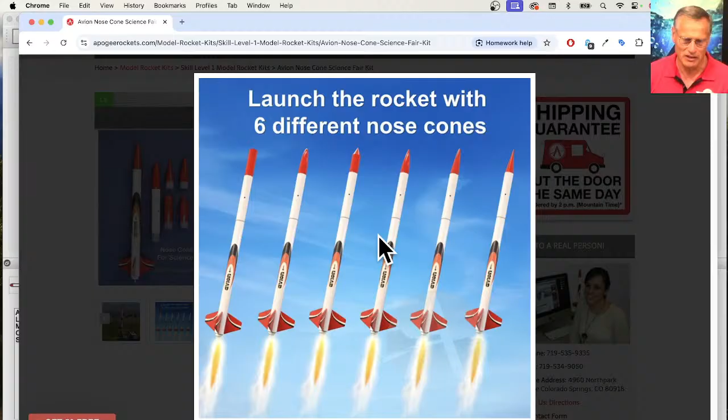So that's what I was working on earlier this week. Last Saturday we had a launch, and I got to fly it, and it worked great. It comes with 6 nose cones. Yeah, it flew great. Just giving you an idea of what I've been working on all week.

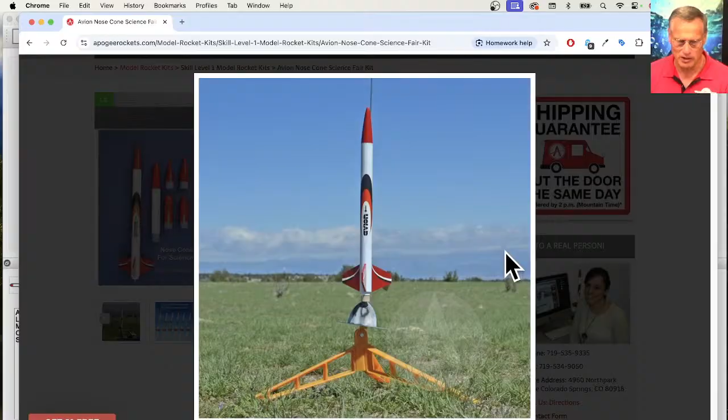So that's available now. We're going to officially release it on Tuesday, but if you want one now, you can get it now. I know most of you probably don't need to do an experiment with balsa nose cones, but if you have a student or a grandchild or a nephew, son, daughter looking for a project, this is an easy one to do. And like I said, it's a lot better now than it was in the past. I had to redo the whole instructions too.

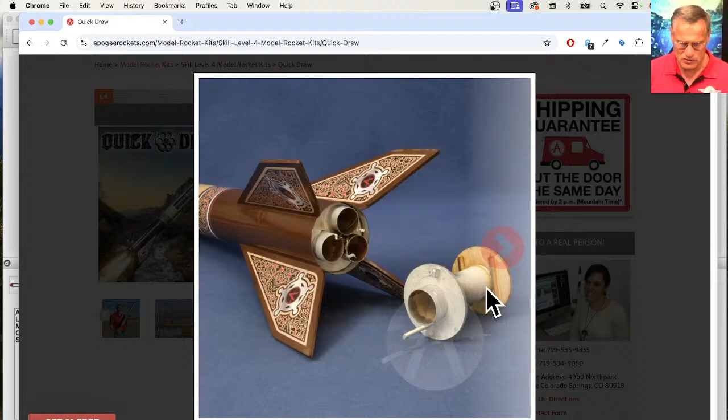So we were talking about the Quick Draw rocket. What it does is it has interchangeable engine mounts. Let's see if I can show you a picture of these engine mounts. So here's a single engine, here's a 3 engine, and it has all these laser cut parts.

We were thinking, if we were to design that today, would we do it any different? And the answer is absolutely, we'd do it different. Instead of doing all this in laser cutting, it would be 3D printed, and it would save the customer so much time.

And I was thinking, well, if I could 3D print that, what would be different? And so much would be different. It would make it a better kit, easier to build, and when it's easier to build, it's easier to prep. It just makes the customer's life better, and probably for no more expense, probably a wash in how much it's going to cost.

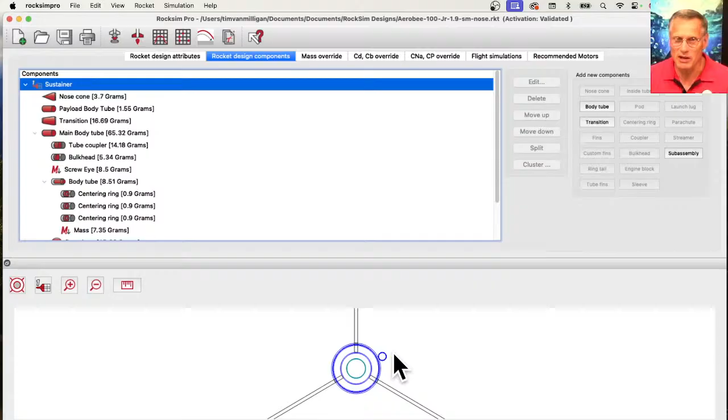I'm in RockSim Pro, which is similar to RockSim. So basically, what he's saying is, if you look at the rocket, here's the base view. What would happen if you put something on the side that was really heavy? How would RockSim account for that? The answer is RockSim would assume all that weight is on the center line.

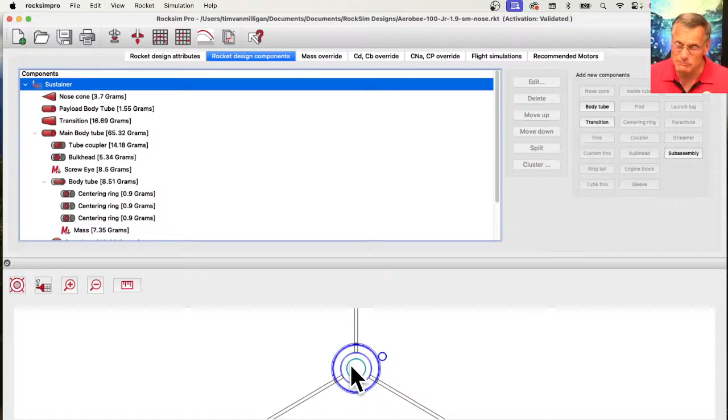Even RockSim Pro assumes the weight is along the center line, I think. How would I test that?

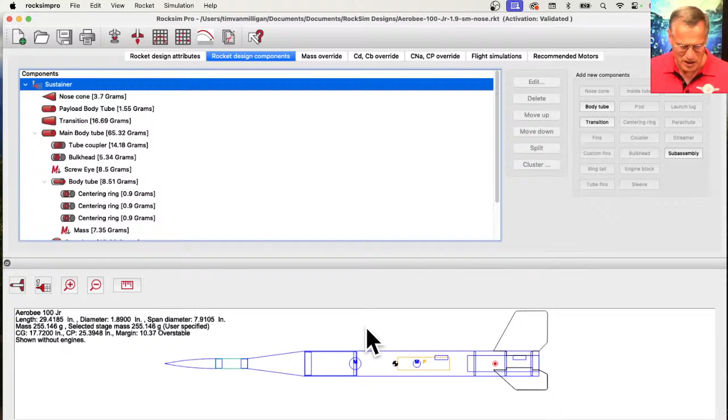Well, let's put something heavy on this side. Okay, so how do you put something heavy on the side? Here's how you can test. Let's run a simulation. First let's put something heavy in here, then we'll run it with the object inside the rocket and then off to the outside.

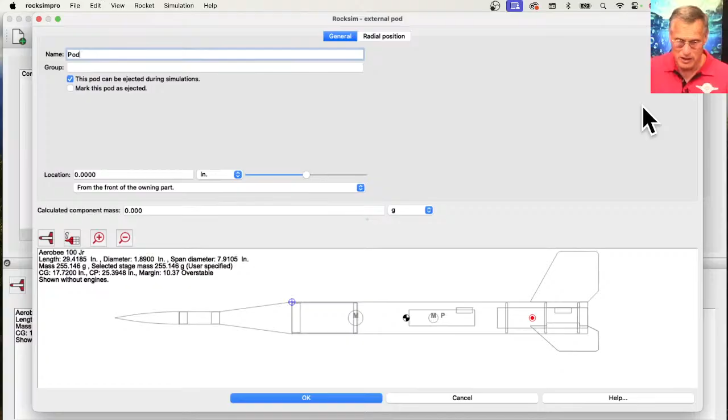So let's select this main body tube, and what I'm going to do is put a pod. A pod is a placeholder, kind of like I'm going to attach parts to the pod. So let's call this pod, and I'm going to say this pod cannot be ejected during simulations. Right now this pod is right here.

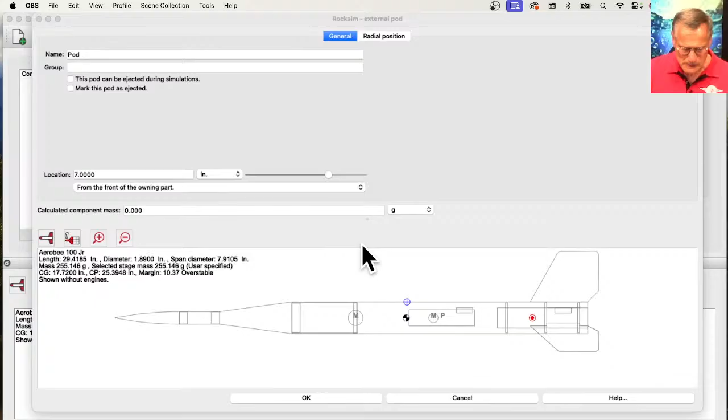I'm just going to move the location. I'm going to put it near the center of gravity. See, here's my center of gravity, and here is my pod. Hopefully you can see that. Okay, and then click OK. So now the pod doesn't have any mass right now, so we're going to attach a mass to this pod.

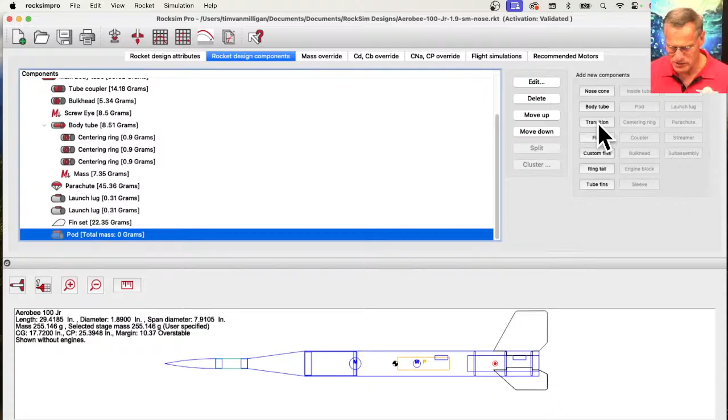I'm looking for something heavy. I want to say a mass object, but I don't have a mass object, so we'll go with a body tube. I'm going to not select from the database, and let's make the outside diameter 1 inch, the inside diameter starting right here, and we'll give it a length.

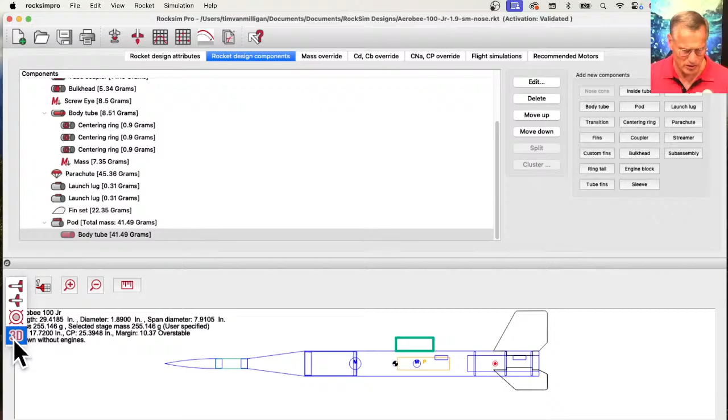2.875 inches. Right now, this has a mass of 41 grams. So we have a mass of 41 grams, and I'm going to say OK. Now if you look at it in 3D, it's just a slug hanging off the side of the rocket. This slug is going to cause drag as well as having mass.

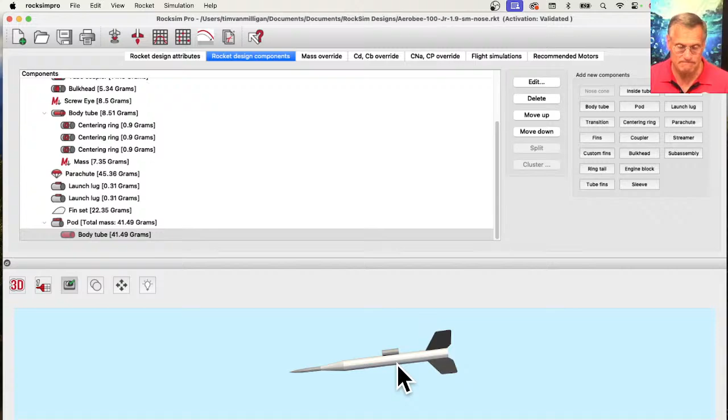Okay, so let's move this mass inside of the rocket. To do that, you come back to the pod, double click on it, and come up here to radial position. Right now it's automatically calculating the radial distance, so it wants to put the edge right along the edge of the tube. If I uncheck both of these and set the radial distance to 0, the radial distance from the center line is now 0. So it's right there, and I'll click OK.

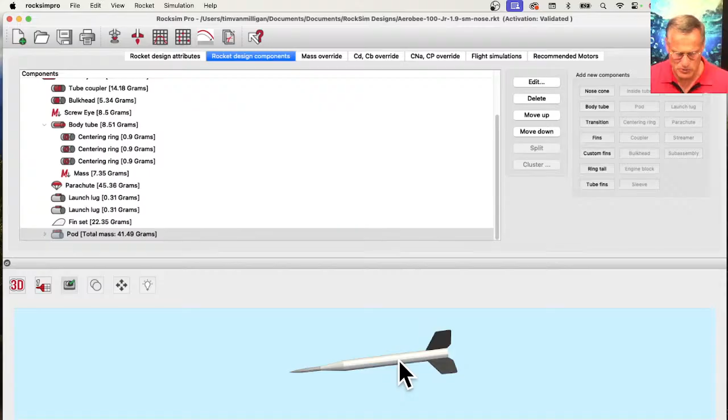So now the mass is right in the middle of the rocket. I'm going to change the name and change the color so maybe we can see it. Let's call this Sluggo Mass, and give it a color, a 2D color that's red, and a 3D color that's red. Click OK. So it's on the inside of the rocket right now, so you can't see it from the outside, but you know it's there.

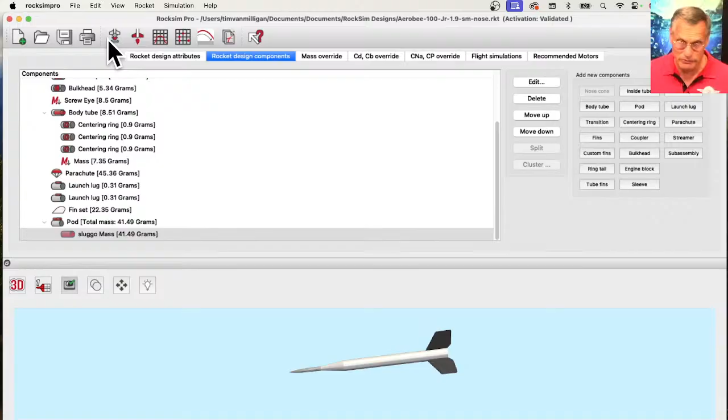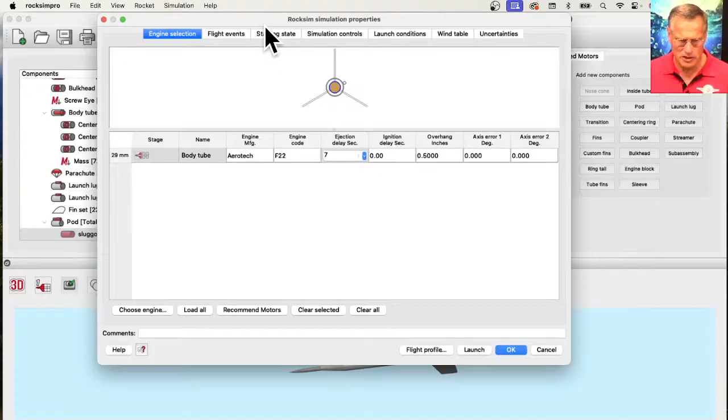So let's run a simulation. Choose an engine. This is a 29mm rocket. Let's go with Aerotech F22-7. Click OK. Now we're in RockSim Pro, so we can do three-dimensional simulations and see the effect. We'll deploy the parachute at Apogee.

So the parachute's going to be deployed at Apogee. Starting state, we're going to launch it straight up, so it's at 0 degrees azimuth, 0 degrees angle from vertical. I'm just looking at my settings here before I launch.

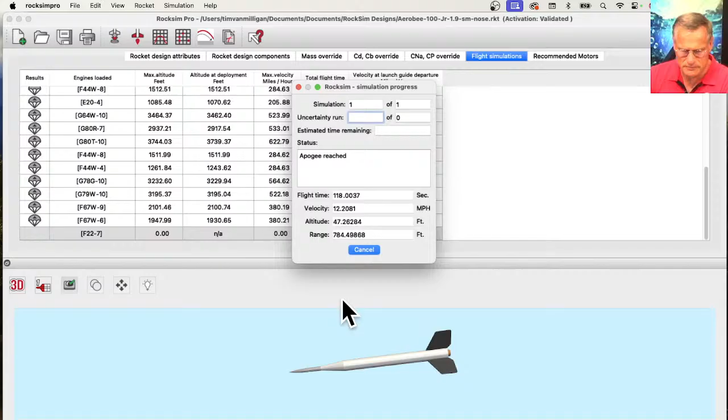So let's run a flight profile and see what this launch looks like. It's going to run the simulation, and then it's going to load the launch visualizer in just a second.

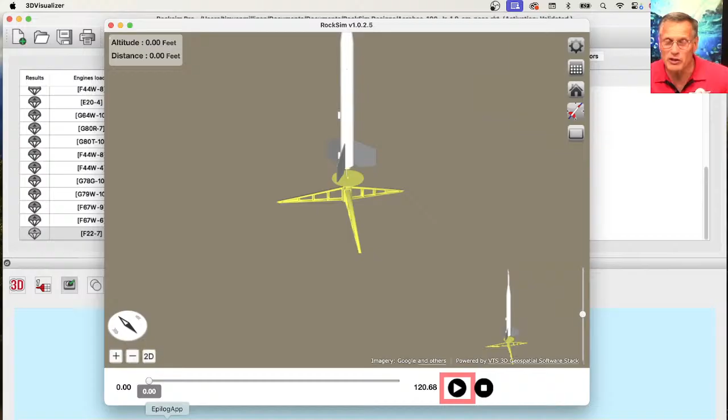While I'm doing that, Johan says, hey, you saw my transparent cockpit canopy? I think I'm on to something. I have not seen your transparent cockpit canopy. We have some canopies on our website, but they're not transparent. But we do have a camera hood that is transparent. We could do transparent canopies. We can't 3D print them because although there's resin that's clear, it makes a step, so you'd have to really sand it and then polish it. You'd have to sand and polish both the inside and the outside, because if the inside had the steps in it, it would give a frosted effect. But resin can be polished like glass, because I've done it.

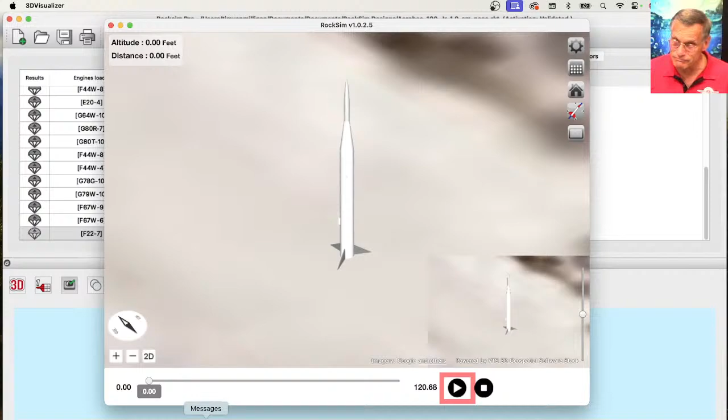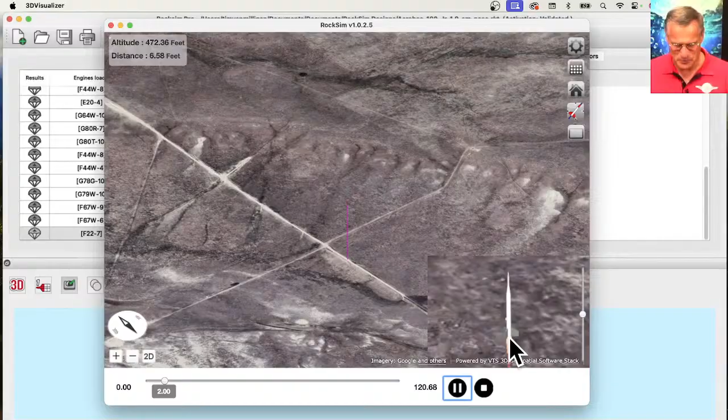Anyway, so here's this rocket. It's sitting on a road out in the middle of a field somewhere, and I'm not sure where this is, but I just want to run a simulation. You can see the rocket right down here is almost dead still. It rotated just a little, but if you look at the trajectory, right there's Apogee. I'm going to zoom out. So this pink line is the trajectory, and it's almost perfectly straight. I was seeing if it was arcing anyway. And it reached an altitude of over 2,000 feet, 2,098 feet to be exact.

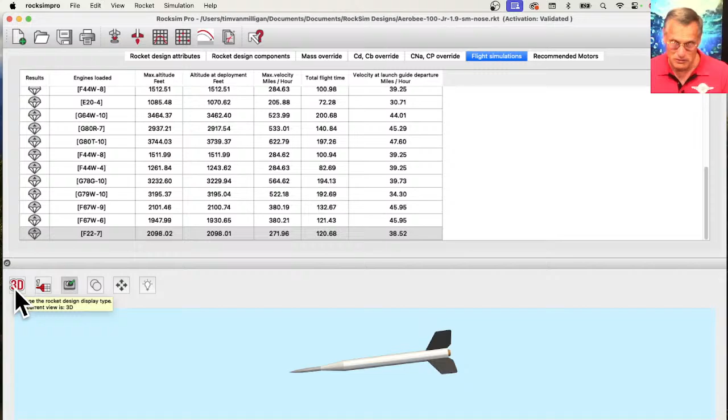Okay, so that's with the mass on the inside. Now we've got to put the mass on the outside. To do that, we're going to go back here to the pod and change that radial position again. So radial position, automatically calculate it - and it didn't like that. It only does it the first time. I wonder what happened. Calculate the radial distance - it doesn't want to.

1.5, 0.45 - right there, that looks pretty good. That's like right along the side now. Okay, it's on the outside of the rocket. And if we look at it from the base view, you can see it's right in line with the fin. That's okay.

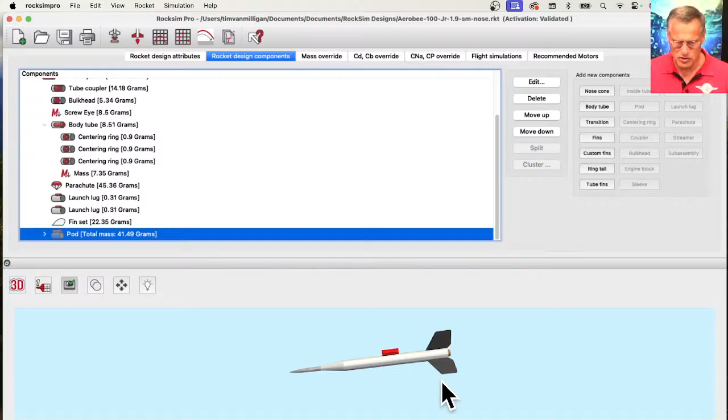Okay, so now we're not going to change anything, and we're going to run another simulation. All the same settings, and we're just going to see what the flight profile looks like with the pod hanging on the side. Now we've got mass off to the side, and we have extra drag on the side. The thing I'm not sure of is whether it's the extra drag on that side or the extra mass on that side - is it calculating it? It's loading the launch visualizer.

You can see that it's sitting off to the side. Somehow it's not showing my launch pad. I'm not sure why.

Oops, I wanted to see this view. So the rocket is sitting right down there. Zoom in just a little bit. And launch.

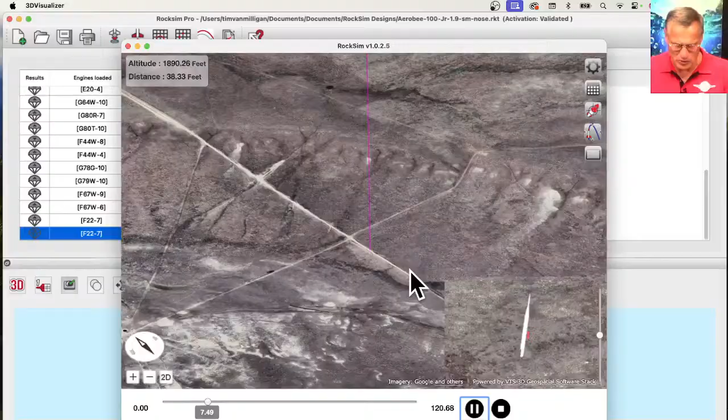Okay, so the rocket is going almost as straight as it was before. And we're going over 2,000 feet, so that it is causing some drag there. I should have a little wobble in this trajectory.

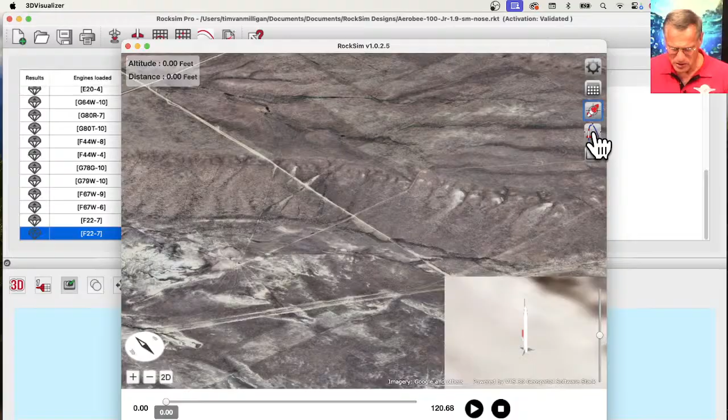Let me pause it. Let's go to the rocket view. Close this one. Let's see if the rocket seems like it's doing anything as it's taking off. It's still like rock solid. It's rotating just a little bit.

Okay, and then the ejection. So if I go back here, yeah, almost the exact same altitude. In fact, it is exact. So we're not seeing anything different. So that answers the question that RockSim still assumes that the center of gravity is along the center line.

But very good question. Rick Dickman says, how do you check motor tube size from a downloaded file? I am trying to confirm a 29 millimeter motor tube on RockSim, but I haven't figured it out. So,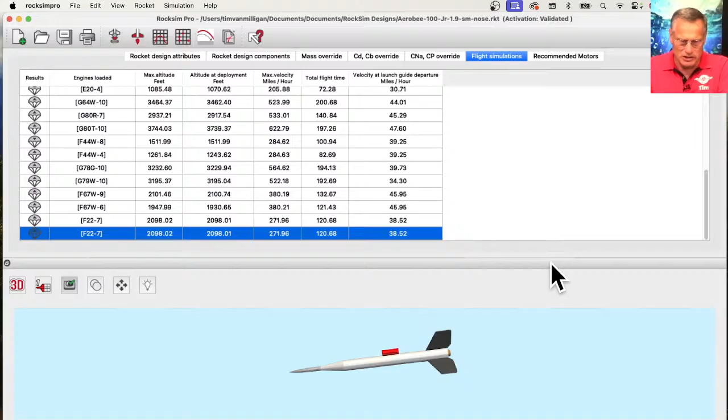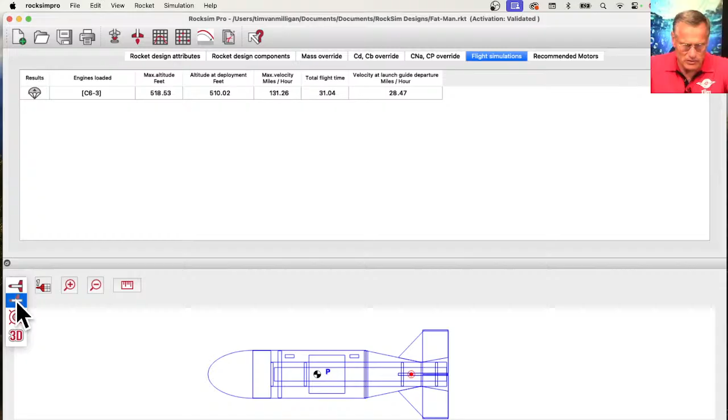So if I open up a new file, and so I got this rocket. Just from looking at the file name, you don't know. You got to open it. Save my changes? No. Okay, so here is this rocket, and just kind of like looking at it, there's no indication here of the motor diameter.

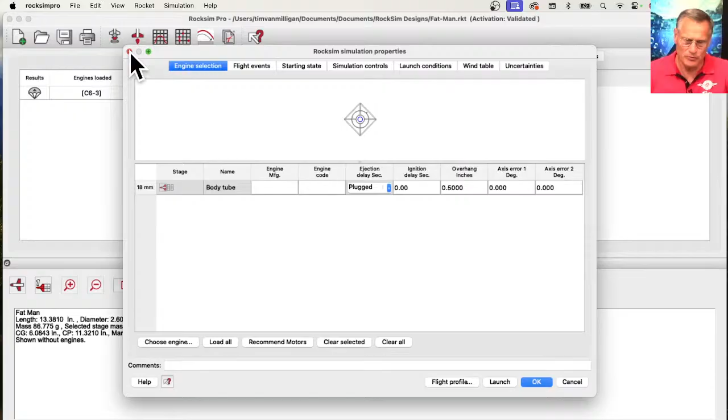So how do you figure that out? Here's the fast, easy way. You just go to prepare for launch, and then right here, it lists the motor diameter. So this particular rocket uses an 18 millimeter diameter motor. So just open it up, and by loading a rocket motor, see what diameter you're going to need.

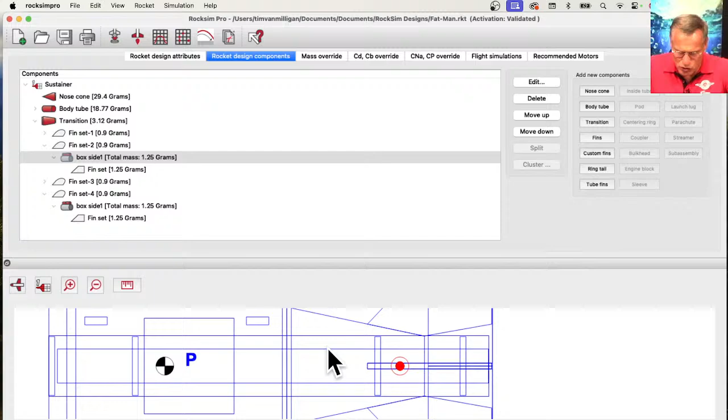Other than that, you could also find the motor tube here in the design. So, I would assume maybe that this tube, no, that's not that. I'm trying to click on this tube. Can't click on it because there's so much going on.

Yeah, so it's kind of like you're looking through the parts list, and the problem is when people design rockets, they just leave the generic names and don't change anything. So like this tube right there, that's a body tube. So this is the tube I was trying to click on because I think that's the motor mount tube, but it doesn't tell me that's a motor mount tube.

So then you have to open that up, and then you look for, this is a motor mount tube. So if it's selected, then I know it's the motor mount tube, and then it will tell you the diameter right there. But like I said, the easiest way is just go to load a rocket motor, and it's going to tell you what diameter you should be looking for.

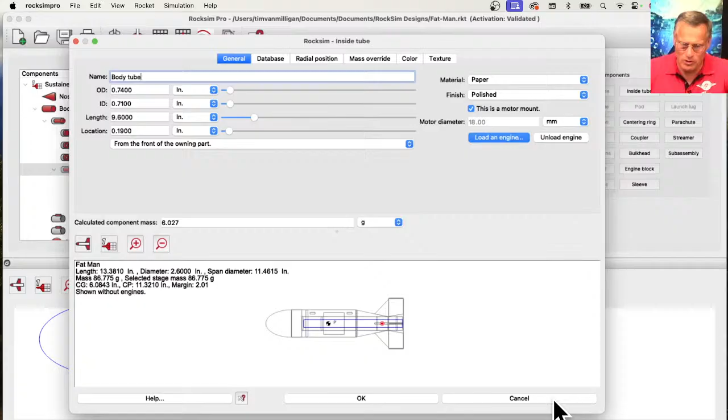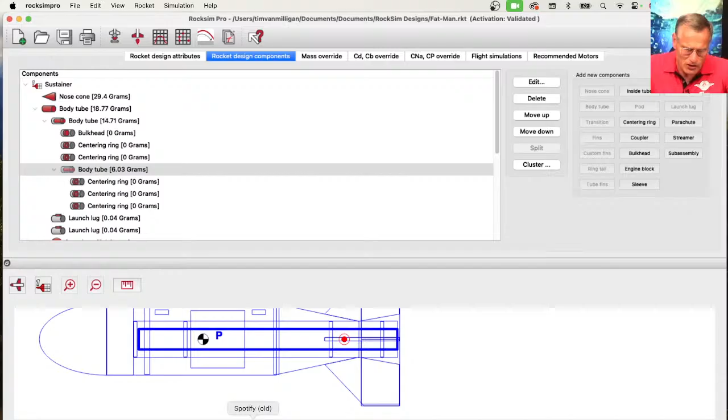David from Michigan is here under the name Purple Haze, and he says, better late than never. And Johan says, I think I found a way to make it out of PET. He's talking about his clear canopy. I think that's what we use ourselves when we make our clear camera hoods.

So this is a camera hood. You can see that it's clear. And it's basically the same thing. And this is vacuformed, and PET vacuforms really well. It's easy, and it stretches really nice. So if you're going to make a canopy out of clear, PET is what to use.

Rick Dickman says, thank you, that cleared that up, very nice. And he was asking about the motor size. All right, so that's all the questions I've got so far. So bring on your questions.

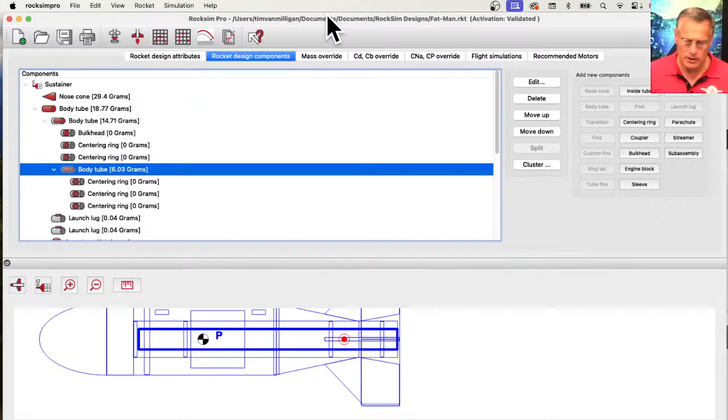I know you're waiting for people to ask questions. Maybe there's something else I can show you on our website. What have we been working on?

We're working on a new Mako kit, a Mega Mako. So here's the Mako, and the Mega Mako is going to look identical, except the difference is it's going to be 4-inch diameter instead of 3-inch. But pretty much it's going to be similar. Martin is working on that.

What else? Yeah, we're working on redesigning 3D components.

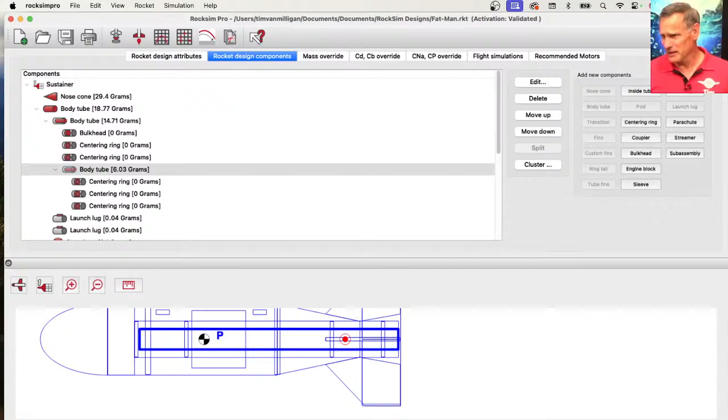So on the RockSim front, programmers are still working on the next version of RockSim. It's actually going to be RockSim Pro, and I showed it to you last week. The big thing we have to look forward to is this RockSim Pro.

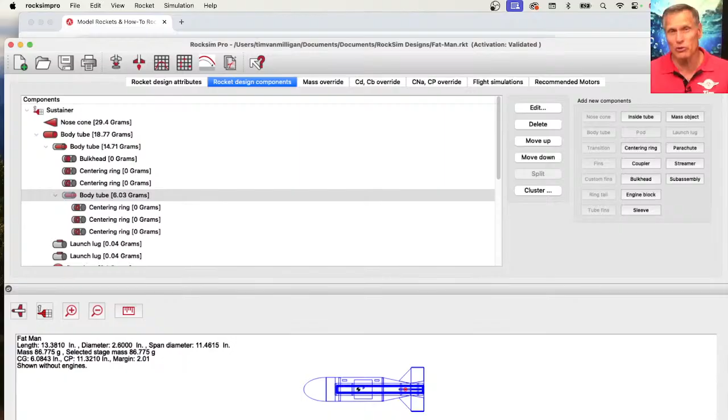RockSim Pro right now is $30 a month. We're going to make it essentially free, and I say essentially - it's not going to be quite free, but it's going to be essentially free because we're going to give it away free to people that spend $35 per month.

So one month you might buy a pack of 2 F motors, like $40. That gives you RockSim Pro for one month. Then you come back the next month and maybe you buy a kit, and the kit is more than $35, so then you get another version of RockSim for another 30 days. You can just keep doing that.

And you're going to be buying rockets anyway, and your Apogee is your favorite supplier. So just keep coming back month after month, and you can get RockSim Pro essentially free. Each one will be a 1 month subscription, but you'll be able to do everything in there.

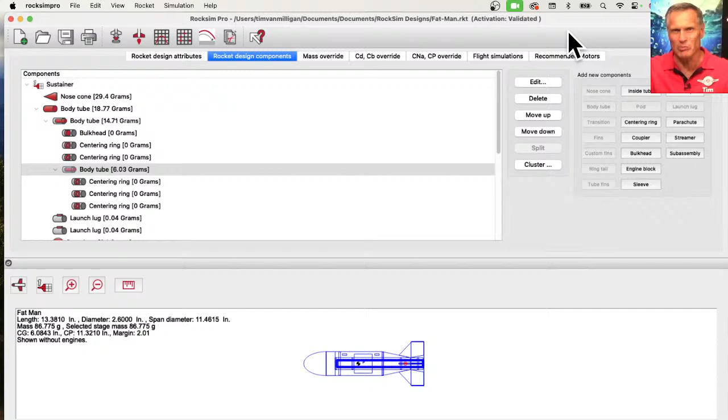But the caveat is it's also going to have some advertising in it. Like you get a piece of software, and the first thing that pops up when you open it up is an ad. Well, that's kind of like what we're going to do. It's going to be ad supported and essentially free.

So our hope is we want to get more people to use it because RockSim Pro is so much more powerful than RockSim, but not enough people are using it because it has a higher price tag. So we're going to take that price tag and make it essentially free.

And Johan says that was him about the Voyager picture. Thank you, Johan.

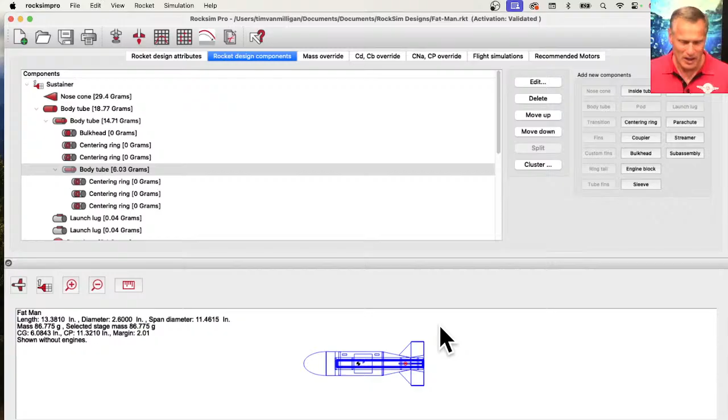Okay, so Curtis House asks the easiest way to get a parts list for a scratch design. So this right here was a scratch built rocket, and this was actually a plan in our newsletter. So to get a parts list, this is the parts list right here.

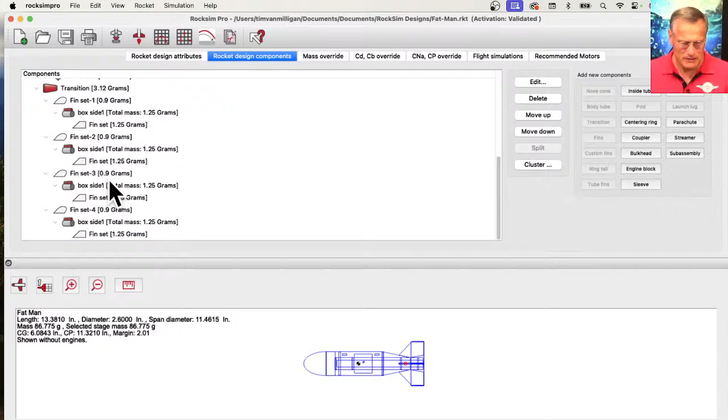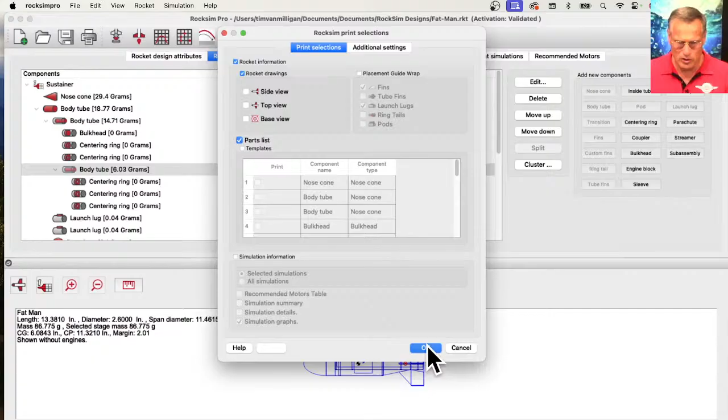To get this as a list, what you do is you go to print, then you come down here to rocket information, uncheck simulation information. If you check simulation information, it's going to give you how high the rocket flew - you don't want that. So you want rocket information, but you don't need any of the drawings - what you want is a parts list. Then when you click OK, under additional settings, click over here and it says print this to a PDF.

So when I click OK, it should bring up a print dialog. And if I hit print, I think it's going to print it as a PDF. And the problem is, where does it put it? I think it put it in the RockSim folder.

So if I go to my applications folder and find my version of RockSim that I'm using - and here's the thing, I've got many versions of RockSim, I think I'm using this one. Let me scroll through here - it's not in the media folder, not in the data folder, not in the designs folder, not in data import. I'm not sure where it saved it.

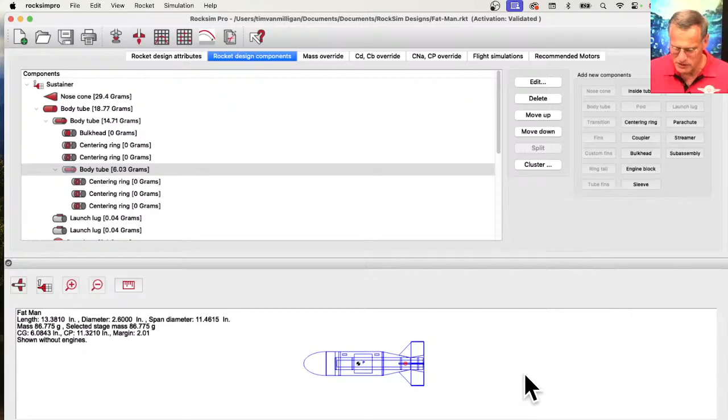Let's try it again. This time I will go print, and I'm going to uncheck here, print to PDF, print selections, and I just want the parts list. Click OK. This time I'm going to select save as PDF, and I think this time it will allow me to select where I want it to save. Okay, it's RockSim Pro. So that's where it should have put it the last time. Let me go back there.

I've got a whole bunch of folders open. Let's put it on the desktop, and I'll call it parts list.

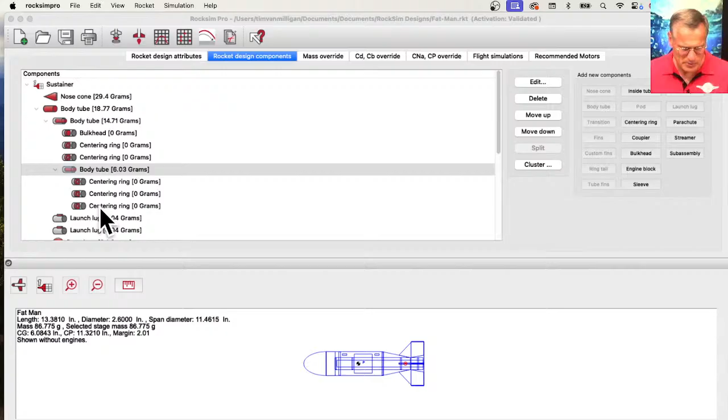It's going to save it as a PDF. So when I go to my desktop, it says parts list. When I open this up, you can print this to a printer or you can print it to a PDF, and this is going to give you a parts list.

Essentially it's the same thing over here. So we have nose cone, then body tube. There's a lot more information here. If you select from the database, it's going to give you the name that's in the database. And if you choose an Apogee part, it'll have a part number.

So this is 10198. If I go to the Apogee website, go to the search bar, and search 10198, and click on it, sure enough, that's the 66 millimeter by 18-inch long body tube.

Then we have another body tube, and it says its name, that's the name you'd use where you order it from Apogee, the name on the Apogee website. But if you look carefully, the length of that tube is 9.8 inches long. So it's not 18, it's 9.8.

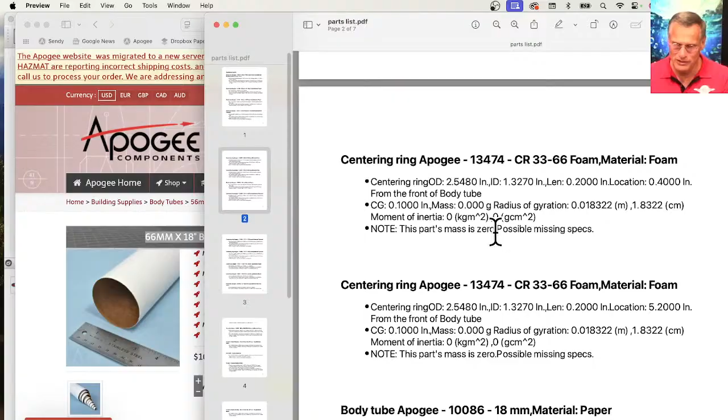Then we have a bulkhead, and it gives you dimensions. Again, this is an Apogee part. This is why it's so important to order Apogee parts, because we try to make it easy for you. Look at all these Apogee parts in there.

If it's something that is custom, you're not going to have all this extra information. You'll have this information down here, but not this name. So it makes it easy to order parts when you buy from Apogee and use parts in the Apogee database.

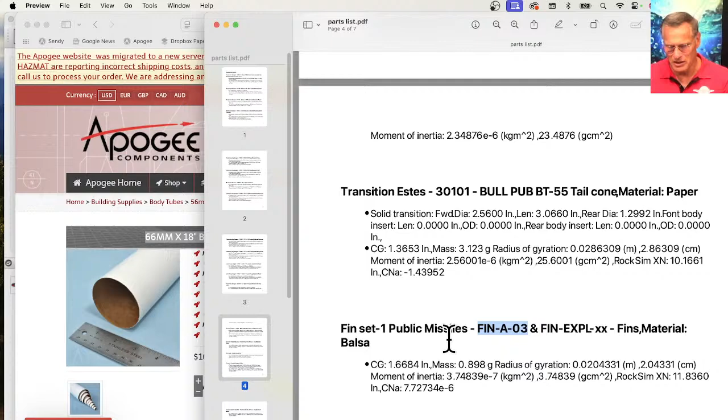Okay, so here's one right here. This was a public missiles fin, but I have no idea what that is. It's a fin A03 from public missiles. And then we have a box, and it's custom material. Another fin set. So it gives you parts.

It's a long parts list. This is 7 pages long. So that's how you do a parts list.

Johan says it's cool anyway. Facebook is a much happier place than Twitter these days. Yeah, we have a Twitter account for Apogee, but I don't know how to post on it. Right now I'm doing all the social media myself.

Estes asks, how can I model transient instability in RockSim during the coast phase of a high thrust short burn flight? Transient instability.

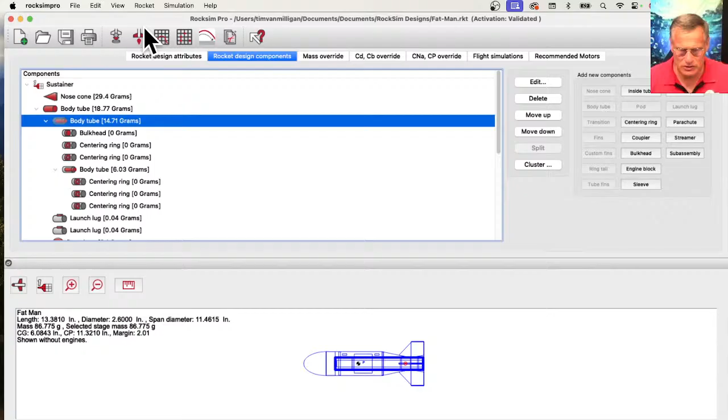All right, let me see if this version of RockSim Pro... it would only be RockSim Pro that you could do it. I'm just double checking if this particular version supports it. Yes, okay, I can show you in this version. First, let me find a different design file.

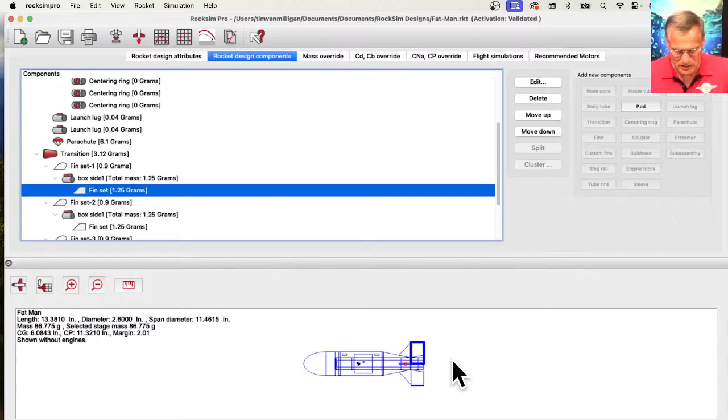Aerobee 170, 18 millimeter, I'm just looking for a simple design. Oh, and I crashed. That's not supposed to happen. Close that.

I wonder if this... I can't see who Estes is. Cancel. If it's somebody that, if it's Adam, I don't know, you can't see the little icon. So I know people at Estes do have RockSim because I gave them a copy. I mean, even Estes should have the best software.

Aerobee 300. Okay, close enough, simple enough. So this instability is going to be caused typically by fin flutter or a tube that is flexible. Now we can't model a tube that is flexible because RockSim assumes everything is rigid. It even assumes fins are rigid.

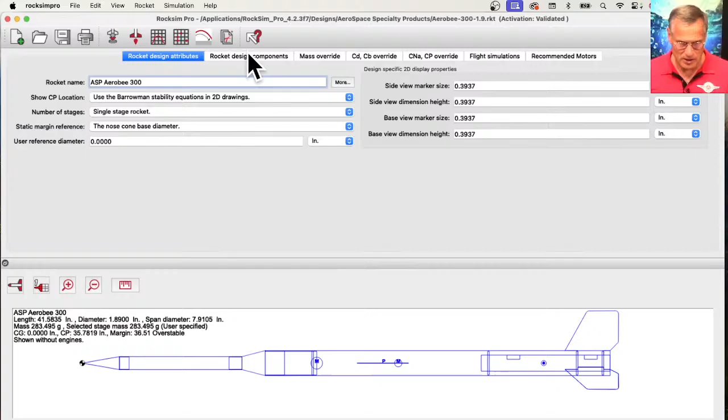But there's a new feature in RockSim Pro that will be in the next version that's going to be released, which is the one that's going to be essentially free. In there, if you go to the design components, I can tweak the fin so that it shifts and makes the rocket unstable. So if I go to the fin set, first of all, you can calculate at what speed the fin is going to start fluttering.

So let's say I'm not sure which material has a shear modulus. In the database we have all these materials, and if you knew the shear modulus of your fin, which is like how stiff it is, it would show the shear modulus here. Basswood does not have a shear modulus. Let's try balsa wood. Okay, so this one does have a shear modulus.

And it's already calculated the speed that the fin is going to start fluttering, and that's going to be 311 feet per second. You can change that to miles per hour if you want, about 212 miles per hour. So if I can get this rocket going 212, that's what he's talking about during the coast phase of a high thrust, short burn flight.

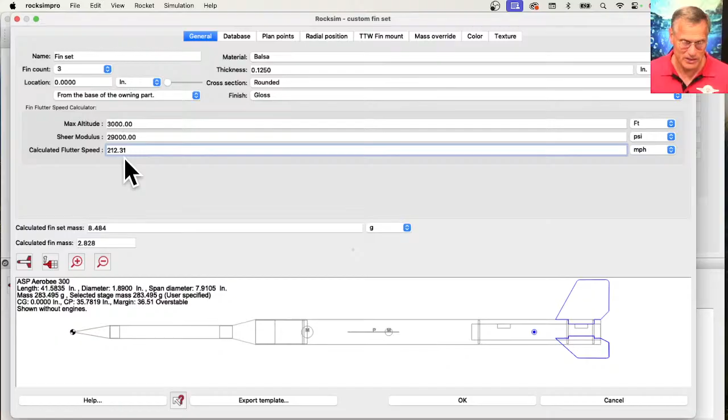So in order to get up to that speed, it's got to be a short burn, high thrust motor. Can we get this up to that speed? Let's take a look. So this is a 29 millimeter motor, I guarantee you I can get up to that speed. So for a high thrust motor, choose it by burn time. You can see we got a lot of high thrust motors here.

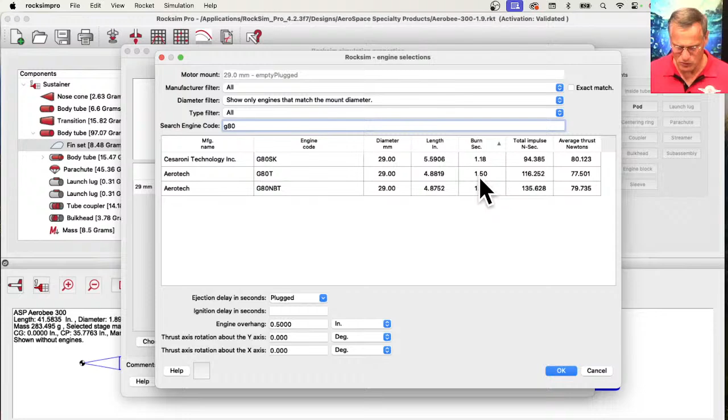I'm looking for like a G80. A G142 is technically a high power motor because it's greater than 80. I was looking for a G80. Come on, G80. Okay, so here's a G80. This has a burn time of 1.5 seconds. And ejection delay, let's say it's a 10-second delay.

And flight profile, so remember before we were just launching straight up, and I don't know if there was any wind or not. It's running the simulation here. Got the spinny ball.

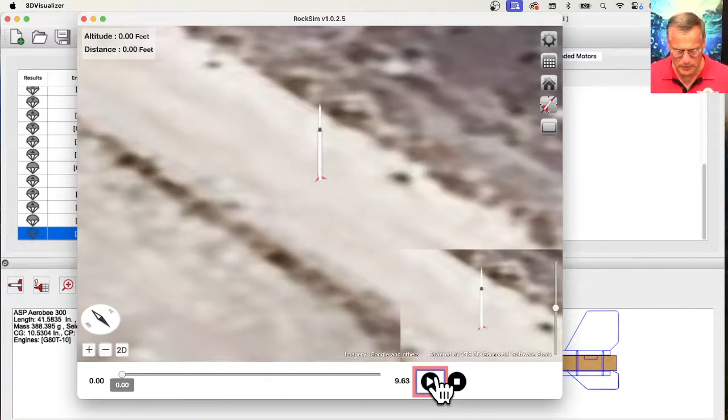Okay, so I don't know where the launch pad is, but anyway, the rocket just blasted off into space. You see how fast that took off.

Let's see if our setup is deploy now. You want to deploy at Apogee. And launch that again.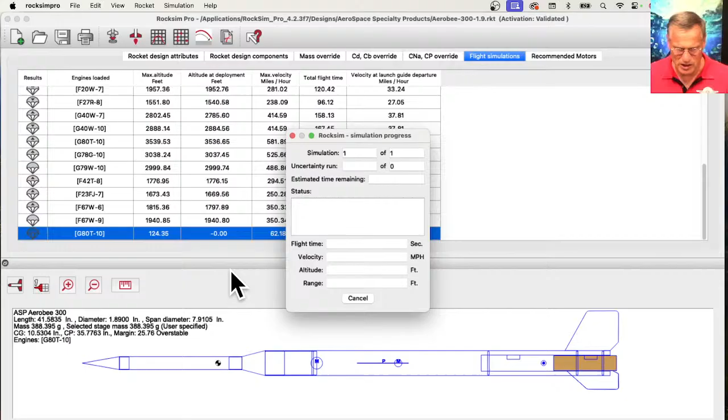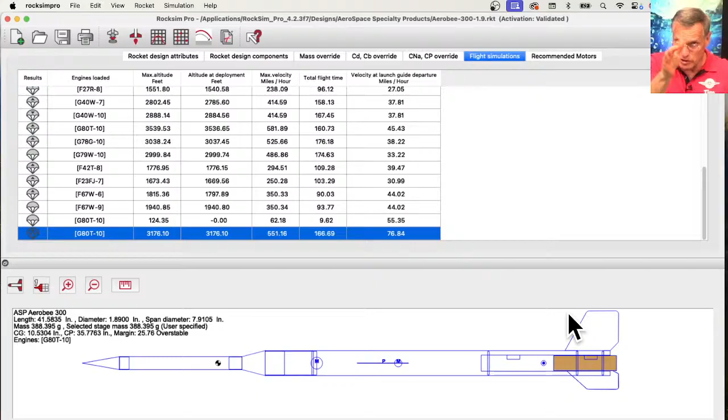Okay, so now we're at 551 miles an hour. So we're well above that threshold of 212. So at 212 miles per hour, there's a chance that these fins could start fluttering because it's just balsa wood. So we're exceeding the speed of balsa, and you know what happens then is your balsa wood just flies apart. As soon as it starts to flutter, you don't even see it, it just, and your fin is gone.

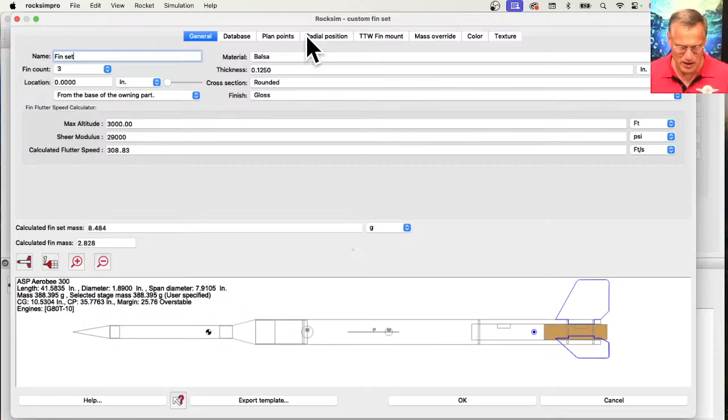So but RockSim didn't show that in the flight. So like what would happen? I can actually go here to these fins and say radial position, and we have a cant angle. So I could say that these are going to cant by 90 degrees. If you look at that, what happened was now the fins, if I look at it from the base view, the fins are at a 90 degree angle.

And what's going to happen, basically, if it starts fluttering, we're going to say enable cant angle changes. And by clicking this button, it says it's going to angle during the flight. So the unfortunate thing is I can't say to do it at 212 miles an hour, I can only do it at a specific time in flight. So we're going to start at an initial of 0 degrees, and then the final cant angle is at 90.

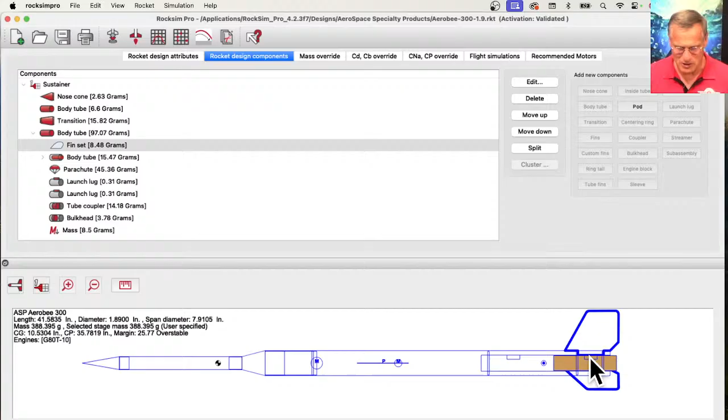But it's something that it's not going to do exactly what you want, but it's going to be fun anyway. Click OK. So here's the rocket, and now if I do a launch, leave everything the same, but if you look under flight events, now I have a new parameter called fin cant.

And I can say these are my choices, I can do a time or an altitude. I can say time greater than 0. This one doesn't work. I was hoping there would be one that's at a velocity, I could do velocity greater than. Some of these other ones, like parachute deployment, I can change other parameters, like Mach number, which is a velocity. But for fin cant, I can only do time and altitude.

So at a time of, I think the burn time was 1.2 seconds or 1.5 seconds, so let's go 2.0 seconds. And then hit tab and hit flight profile, and let's see what this looks like.

421 Rant says, if using multiple engines, and you want to angle them for increased stability using the center line through the rocket, should the angle be pointed between the CP and the CG?

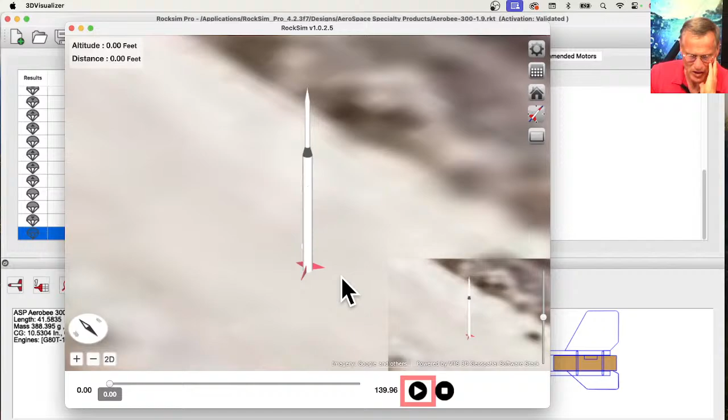Okay, so that was a good question. So here is this rocket, and it's going to take off, and at 2 seconds the fin's canted, although in the flight profile it doesn't show them moving.

So let's look at the trajectory and see if we can see anything in it. No, not really.

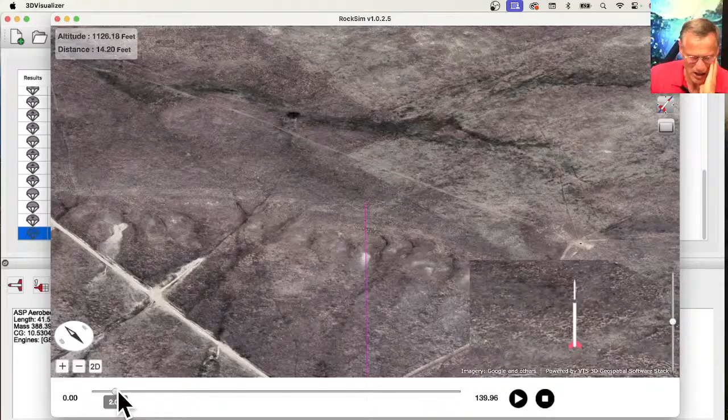Rocket is still going straight even after 2 seconds. So 2 seconds is right there in flight, and at that point they canted over. But you can tell the rocket still went 2,600 feet, though it was a lot lower than the 3,000 feet originally before we canted the fins.

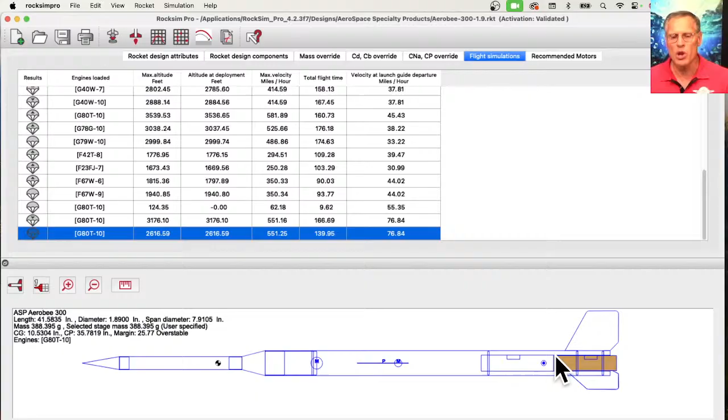421 rants, it's 3 o'clock. If you have multiple engines and want to angle them for increased stability using the center line through the CP, should the angle be pointed between the CP and the CG? The answer is no. It should be pointed at the CG.

Holy cow, on this one the CG is way up there. Why is that CG? Do I have a mass override turned on? Use the mass below. See, yeah, I do have a mass.

So if you were to angle the motor tube, you want to angle it not between these two, but actually slightly ahead of the center of gravity.

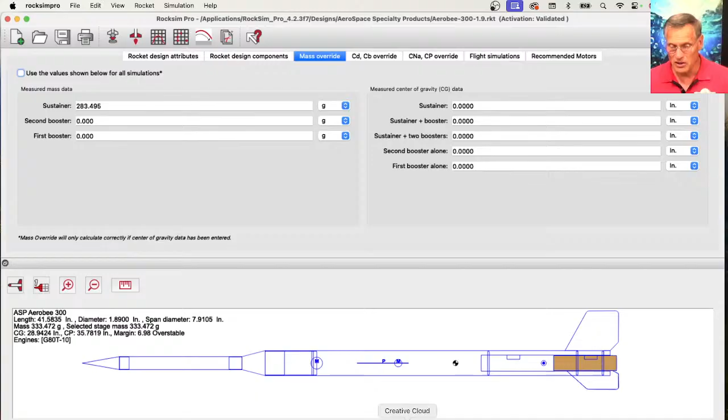I did a newsletter article about that, and we talked about why you do that. Let me see if I can find that newsletter. I can point you to it. It's a Peak of Flight newsletter.

Let's try searching. To do a search on the web page, you'll get this bar here at the top right. Let's try 'cant.' Make centering rings for canted motors, that's one of them. 226, simulated canting motors in RockSim, stabilize your rockets. 363, what does 363 look like?

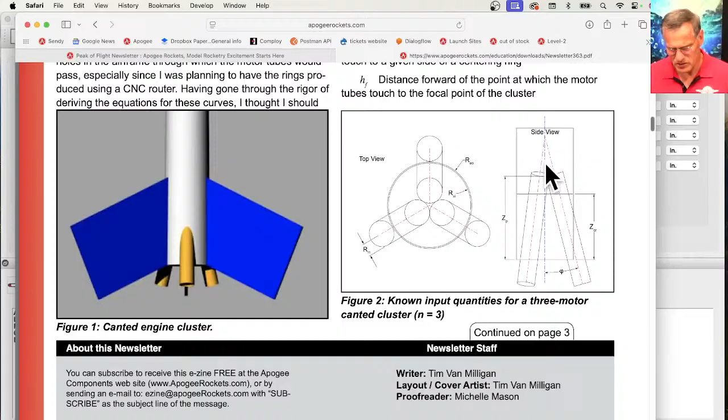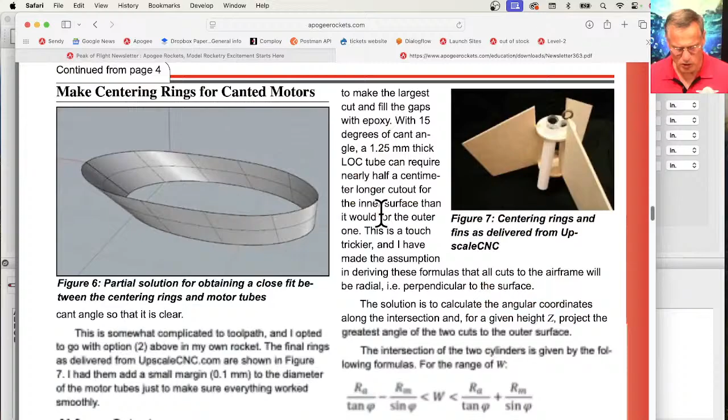Maybe I did it as a video. Okay, so here's the motors being canted, and this is how you make a centering ring for them, and how to draw the arc. Let me go back here to the website. So that was newsletter 363.

How-to and guides, Peak of Flight newsletter. No, we want advanced construction videos, all videos. Find file, canted. How to build a canted engine mount. I'm just looking for an image to show you. Shoot, I think this video has an image, but...

Ideally, what's going to happen is as the motors are burning, the center of gravity is moving forward, and you still want it just a little bit ahead of the center of gravity. By angling it to where it's a little bit ahead, you have a better chance of getting that center of gravity where it's going to be at burnout of the motor. That's why you want to be a little bit ahead. Normally, if it was a fixed thrust and you didn't lose any weight, you'd want to point right at the center of gravity, because the rocket's always going to spin about the center of gravity. So if it's pointed at the CG and everything is equal, everything should balance out.